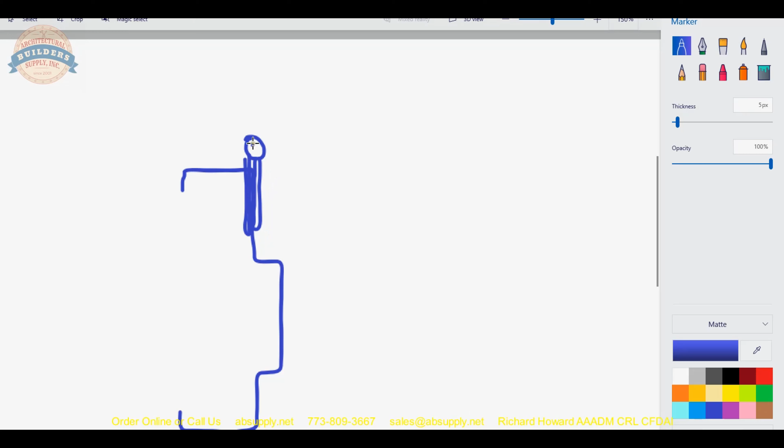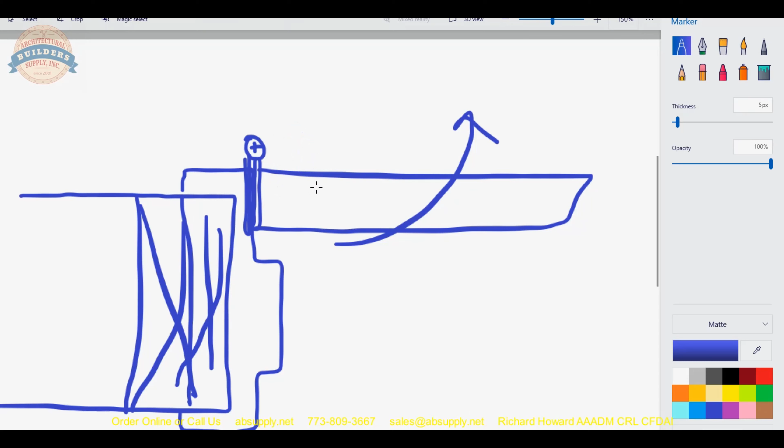But there are many times when a narrower hinge than tall is really the appropriate hinge, the most appropriate hinge to use. It would be considered best practice. Let's take a look at our screen here and discuss why that might be the case. Now, why that might be the case would be when you have a scenario where you have a frame. Single rabbet, double rabbet, just doesn't matter.

Okay. Your hinge barrel is over here. Your hinge leaves come here. Okay. Your vertical axis of pivoting, that plus sign. You have your door. Okay. In a situation where your frame wraps the wall, okay, a couple of studs, there is no reason to use a 4.5 by 4.5. That's projecting hardware unnecessarily. It's only a 1/4 inch, but it really does matter, in fact.

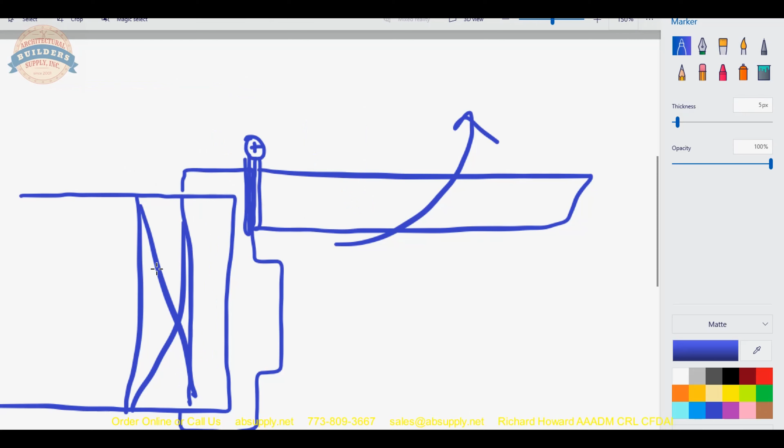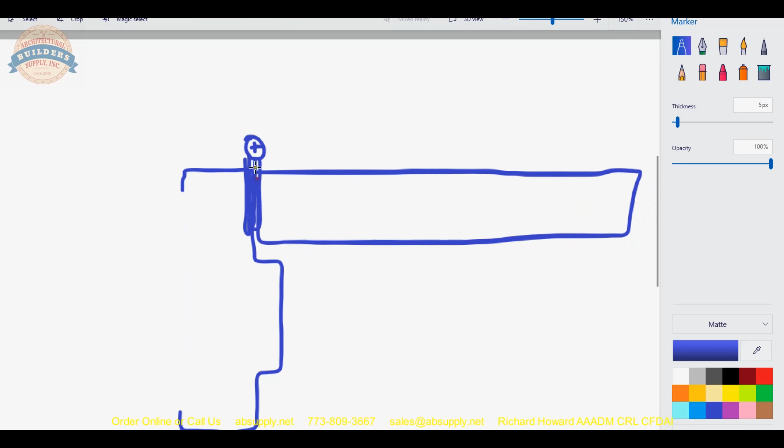Best practice would be to bring that hinge and the vertical axis of pivoting closer, tighter to the face of the door in the frame for a couple of reasons. Less projecting hardware as you're headed down the hallway. Otherwise, that barrel is going to be sticking out a little bit further. Okay. Also, it makes the hinge more efficient when you're carrying the load and you bring the vertical axis of pivoting closer to the center of the thickness of the door, at least closer. It can do its job more efficiently. Very much appropriate when you're dealing with heavier doors.

But when you're dealing with a standard weight door and you're dealing with a door that could be cycled millions of times realistically over its life, yes, every little way in which the hinge is going to be applied is contributory to the long-term health of the opening. So in this scenario, a 4-inch would be a great option, and you will very often see it in aluminum storefront doors where that frame can very generally butt up to the wall. 4-inch is very common in aluminum storefront.

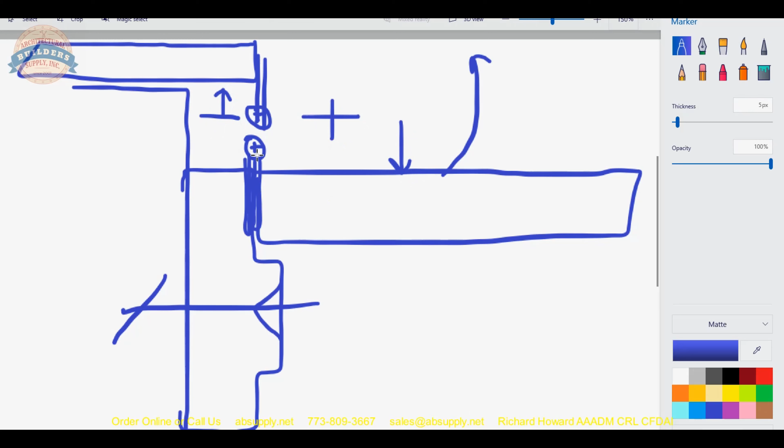Now here's where you kind of need to think about the width of the hinge a little bit, in the sense that 4.5, that's probably going to work, and probably going to work all the time. We've just talked about why a 4-inch might be a better option. Here's why a 4-inch may not be a better option. You have 8-inch CMU. You've got a 5 3/4 frame that's been bolted through, right?

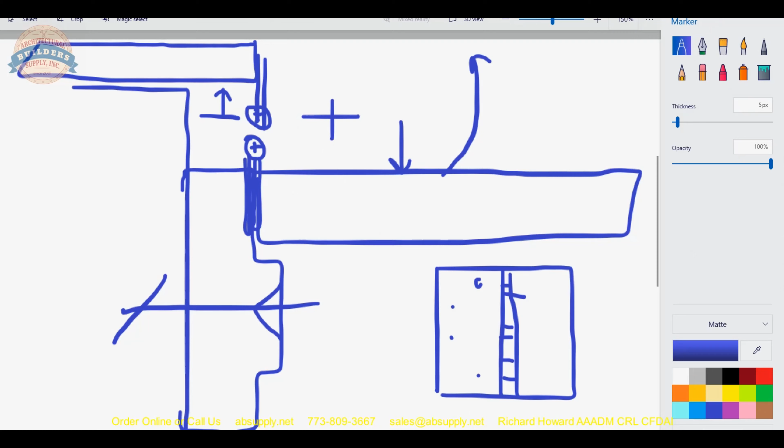And now your client is telling you, listen, I have to have that door go to 180 degrees. Okay? Now you've got to bring that hinge barrel out here to get that to the point where your vertical axis of pivoting will give you the clearance dimension here, and then the clearance dimension here, so that you can swing that door open.

Okay? So thinking about the width of your hinge is really important. Okay? How wide that hinge is going to be needs to be thought out. You can really get away with 4.5 in almost all instances.

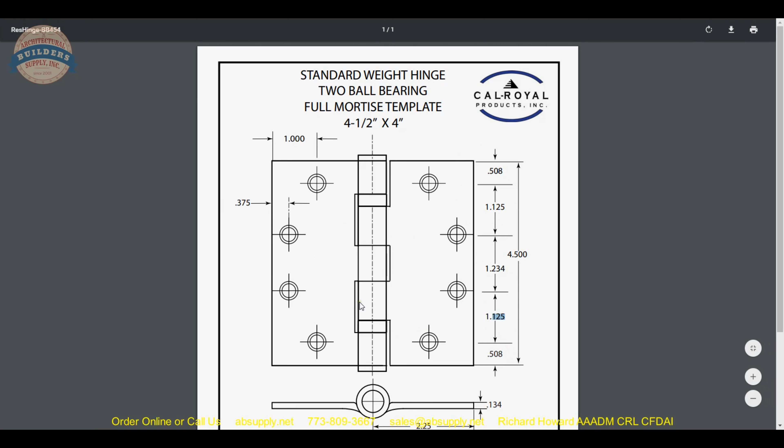This client ordered 4.5 by 4. They could be just simply matching existing, or they might be aware of the fact that it's better to bring that in. So those would be a couple of instances where you should think to yourself, okay, what do I want to do here in terms of the width? When you have a 4.5 by 4 or 4.5, that's great, but you can also do a 4.5 by 6, which might be what this sort of wide throw, and that's what they call that hinge, application would call for.

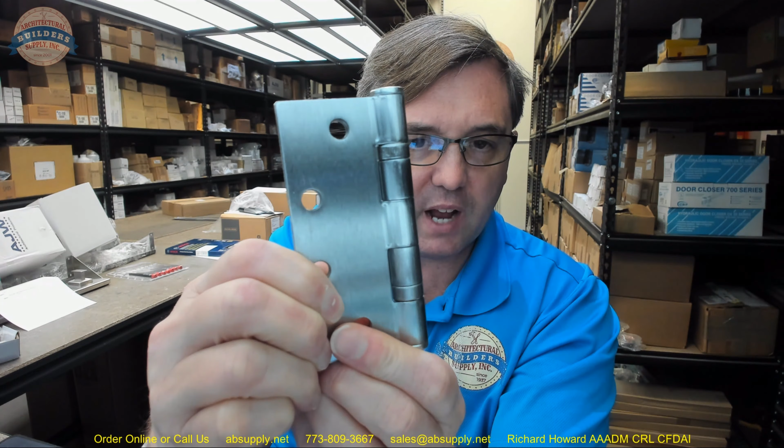Now, back to the page in the website where we're looking at it, we have a link to the document called Template, and that will show us all of the important dimensional properties of our hinge, namely where the holes are located. This is a template, but the location of these holes is called the template pattern, and the template pattern is a standardized pattern by which all manufacturers, if they're selling you a template hinge and it's 4.5 inch tall, will always observe all of these dimensions, okay, without deviation. If it's a template hinge that you need, like for a hollow metal frame, it will observe these locations, okay?

Now, let's take a closer look at our hinge and the extended description on the camera. Now, this hinge in particular has a feature to it. It's non-removable pin. That set screw that's there, that you will notice from the outside of the hinge. You can see it there, but what's important is you won't be able to fit your Allen wrench in behind here to get that set screw out.

Okay? What's happening here is in the barrel of this hinge, if I were to loosen the set screw and then drive the pin out, there will be a groove cut in that pin. When you tighten the set screw down, the set screw goes into the groove and all but prevents you from driving that pin out. I've tried. Can you do it? You can. It's possible, but you're going to destroy at least the hinge, if not do damage to the wall frame and the door as well. It is a very effective means by which to eliminate the driving of that pin out,

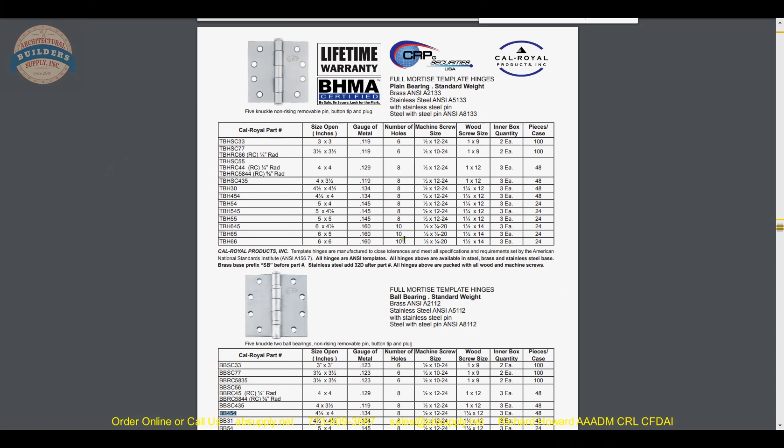I've had people call and say, yeah, I didn't get enough wood screws. What size is the hinge? 6 by 6? Okay. Yeah, that makes a lot of sense because for the manufacturer to ship out any machine screws or to at least not ask, that's odd. I mean, where are you going to use a 6 by 6 on a hollow metal door and frame? It's certainly not impossible, but you're probably not going to.

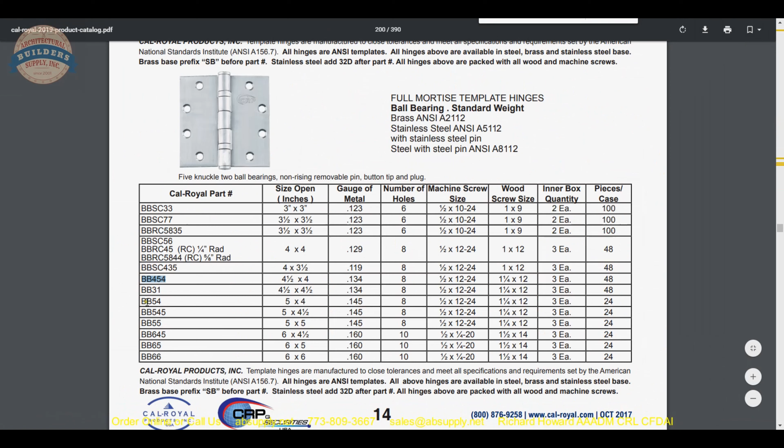So clarifying that. This is going to be available in all the common finishes, your brass, your bronze, your chrome, your oil rubbed. They can do this size in stainless. They can do this size in heavy weight as well, which would be 180 thousandths.

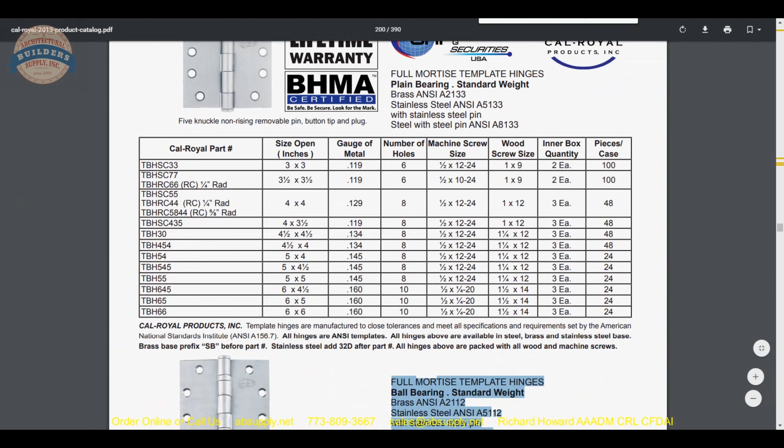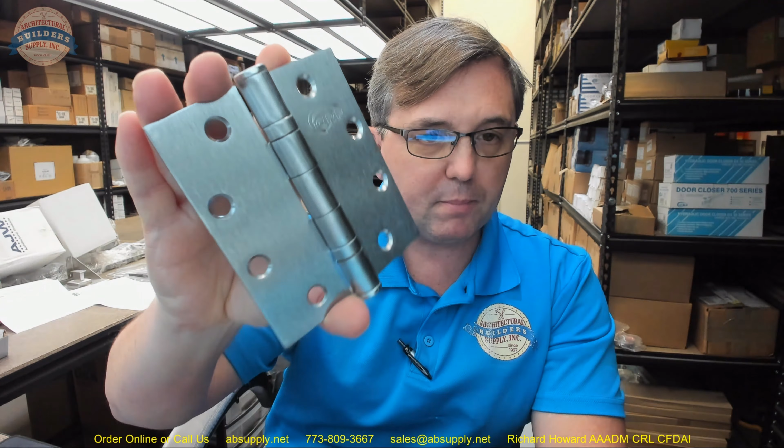What I don't love is the logo. I don't like the big corporate advertising on my hinge. Their logo has changed over the years, as has everyone's. I like them a bit more petite. I'd like that to be a bit smaller. Cal Royal is a company that should be proud of themselves and display that prominently on their hardware, but maybe in a more elegant way would be my recommendation.

Now, let's take a look and see if we have a cut sheet for this hinge. There's a link below this video to the cut sheet. It's not much of a document, except that it does show our hinge and the other part numbers that relate to hinges. BB454. Different part numbers, different sizes. Does give us the overview of what we're dealing with. And that's the cut sheet from the manufacturer. Let's wrap up this video.